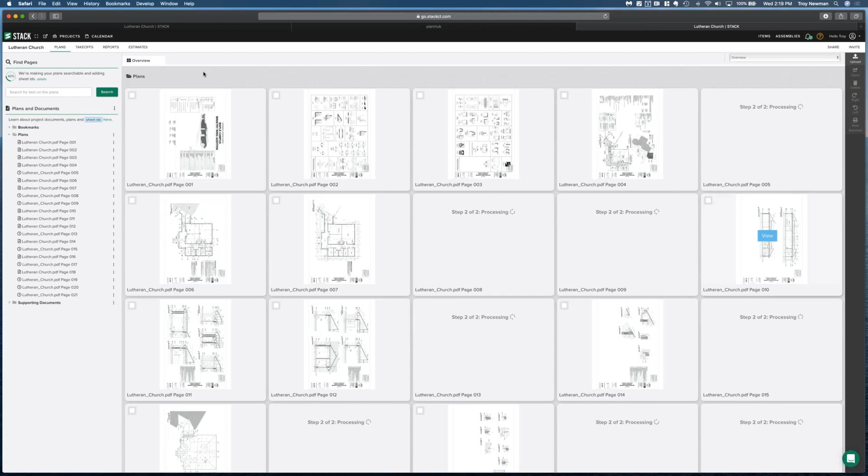Once they upload, they'll start to process through, and we're doing a number of things at this stage. We're taking that individual PDF and splitting it out. Let me hop into one that's already processed through. We're going to split that out into individual thumbnail images. We're also OCRing all those plans to make them content searchable, and we are also adding automatic hyperlinks so that you can zoom in and find the details.

As a best practice, if you're dealing with a large project, we don't have any limits. So whether your project is 20 pages, 200 pages, or 2,000 pages, finding the plans you want to measure is really key. We give you some solutions to help with that.

So I mentioned everything is OCR, so we can do a search for that. And we also do visuals, so we give you the thumbnails so you can quickly see, well, this looks like a site plan. We have some elevations here, some architecturals here, and a roof plan down here.

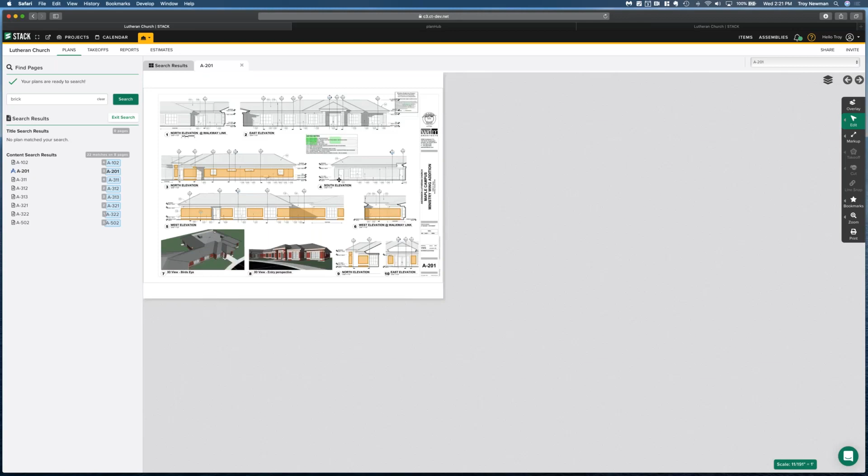So we do that as a way for you to find more quickly what you're looking for, but you can also content search. Say that I was looking for anything that had the word brick on it. It was very fast. We found 22 matches on 8 different pages. To see one of those, I'm just going to click on it, and it's going to open that page up. At this point, I'm just going to hold down with my mouse and use my scroll wheel to zoom in, and we can see that it has identified the word brick on those pages.

What's also really nice is it filters your overview. So whereas we had many plans here before, it is only going to show me the 8 plans here that have to do with the brick. So if that's all I'm interested in measuring, I can stay and just work from this view. If you want to see everything back again, we can just exit search and back we go.

Also, by default, everything is going to upload into the plans folder. It's a best practice to be organized, and it's very, very easy to create new folders within Stack. There are some general plans down at the bottom, so you can create a folder and then basically just drag and drop those plans into the folder structure. Very, very easy to set up folders and organize your project.

All right, so we've done text search. Let's talk about hyperlinking. If I click into sheet A101, I can zoom in here and see that we have hyperlinked this detail. What this is saying, as you're learning and trying to figure out what to measure while reviewing your project, is that there's something going on in this area of the plan on page A121, section A.

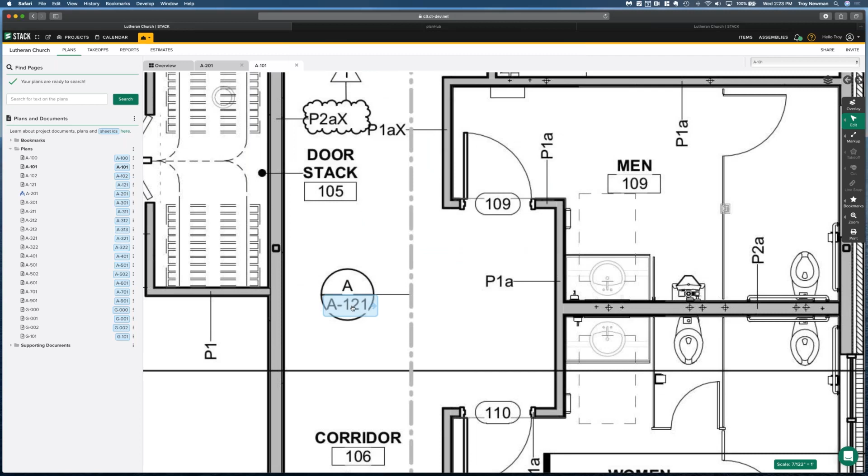What's really nice about this is once you get to your spot, we're going to remember your zoom level for this detail. So I can close this out, and if I go back, it's going to take me right where I left off. Now, if I wanted to further review this, I could open this up in its own tab above, or open this plan in another browser window. If I wanted to drag that over to a second, third, or fourth monitor, I'm just going to grab that tab and move it over just like that.

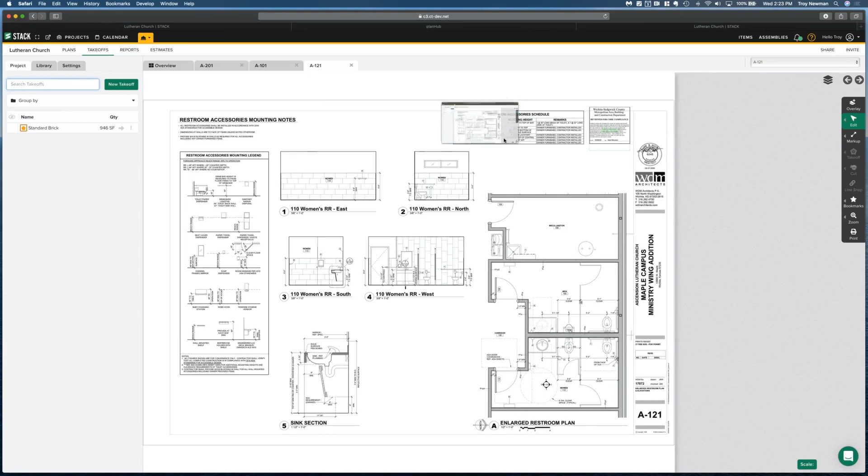So a number of ways to help you quickly identify, understand, and get to measuring on your plan.

So let's talk about measuring. Right now we've been focused on the plans tab up here in the upper left, just to orient yourself to the screen. To measure, we're just going to go one tab over to our takeoffs. You can see that I started one here just as an example - I started to measure this brick, and you can also see that the thumbnail shows the brickwork that I've measured.

So you can quickly reference just via the thumbnails, okay, I've done some measuring on this plan, and we're also going to put this little compass symbol right there, again, so you can quickly find the plans that you've measured on.

So I started with some brick here. Again, Stack works with any trade. We'll get in here and do some measuring on some walls in a minute, but it doesn't matter if you're in masonry, concrete, plumbing, electrical, or landscaping - the sky's the limit with what you can measure in Stack.

And what's really nice is the tools. I'll run through the drawing tools, but they all function the same, so you don't have to learn a new drawing technique based on the industry. All of our tools work the same. So let's hop in, like I mentioned, and measure some walls.

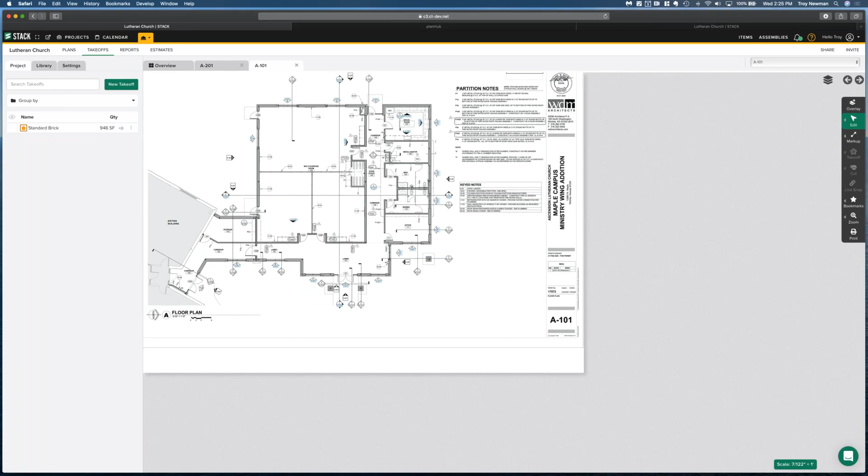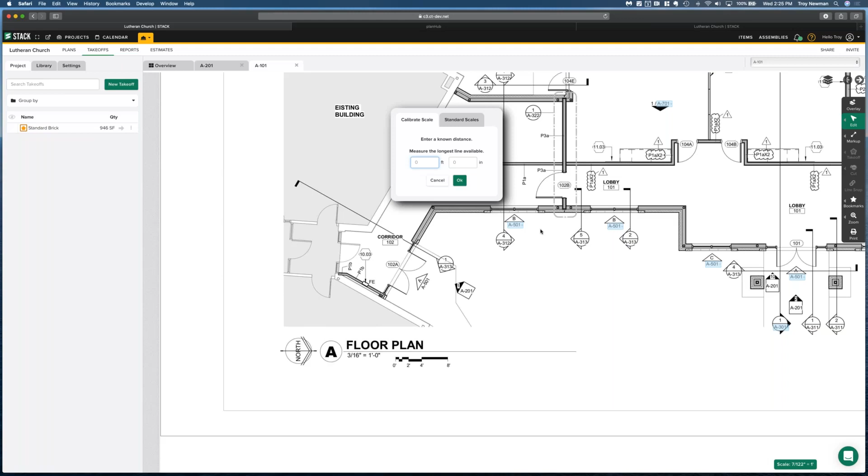Another best practice is the scale. This one, and we randomly picked this project, but it appears to have a scale issue on the other plan, so I'm suspecting it will here also. So we give you two different ways to set the scale. You can click on your little scale box and calibrate, which is really important. If there's a known dimension on the plan, you can use that to calibrate.

Or sometimes the architect was nice and gives you a nice little scale here. So I could say, you know what, there's an 8-foot known distance. I'll click OK, do one click here and one click here. Once you calibrate, you can be 100% assured that your scale is correct.

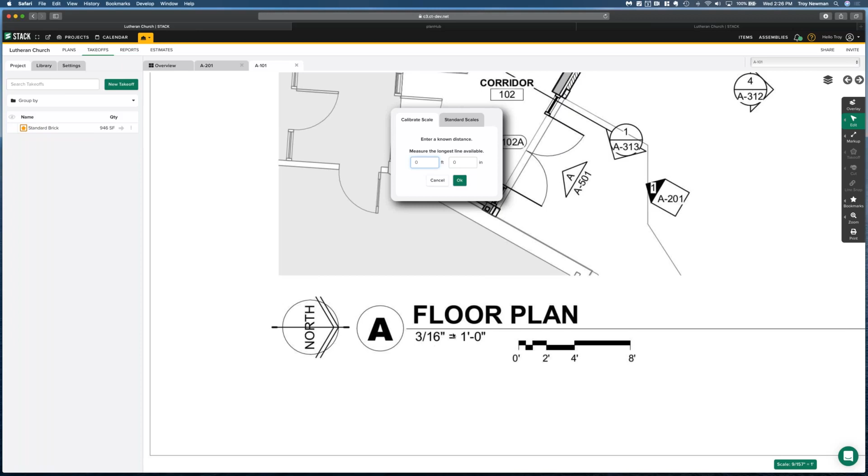Let me show you the other route here. I could go with the scale that's listed, right? So the architect lists this as 3/16. I can go to standard scales - we've got our architecturals listed above, civils down below - and I can grab that 3/16 scale. If you go this route, best practice, please verify the scale.

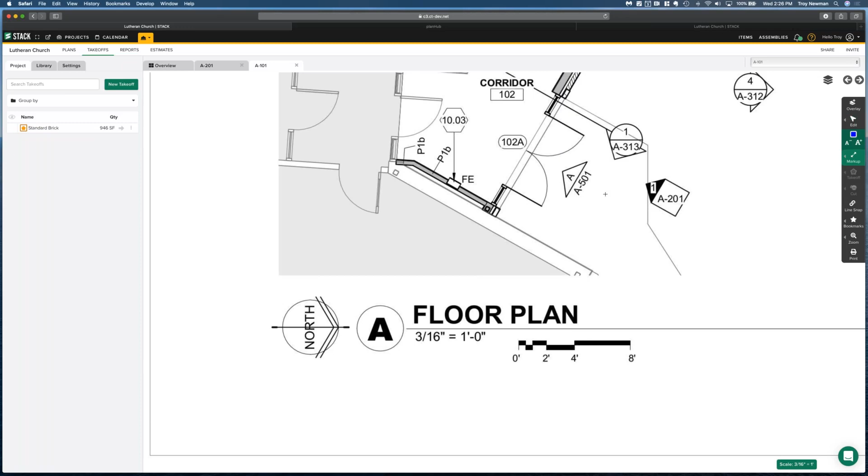So we have a number of markup tools, one of which is a dimension line that you can use to verify. You can verify here or anywhere a known distance on the plan - a standard 3-foot door should measure. We can see, okay, telling us the door width is a little over 10 inches. We can clearly see that we have a scale issue with the plan.

If we go over here, 8 feet, we can clearly see. Usually if a scale is off, it's not off by a couple inches, it's off by a significant amount. So again, highly recommend calibrating - that's just the surefire way, but if you're going to go with the standard scale, just please verify it with the dimension line.

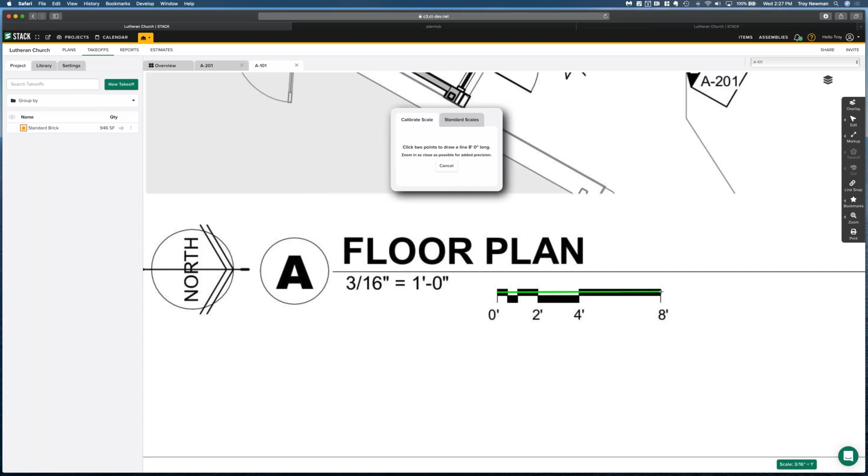It doesn't matter how much work you do on the project, if the scale is incorrect, it's not going to help you. Luckily, you can change the scale after the fact. So if I had completed all my takeoffs and noticed my square footage looks a little off, you could simply multi-select everything you've drawn and change the scale.

So best practice is use software. It makes it so much easier. A lot of people still measure on paper, which is great, it's functional, but software gives you so many advantages. Let the software do all the hard work for you.

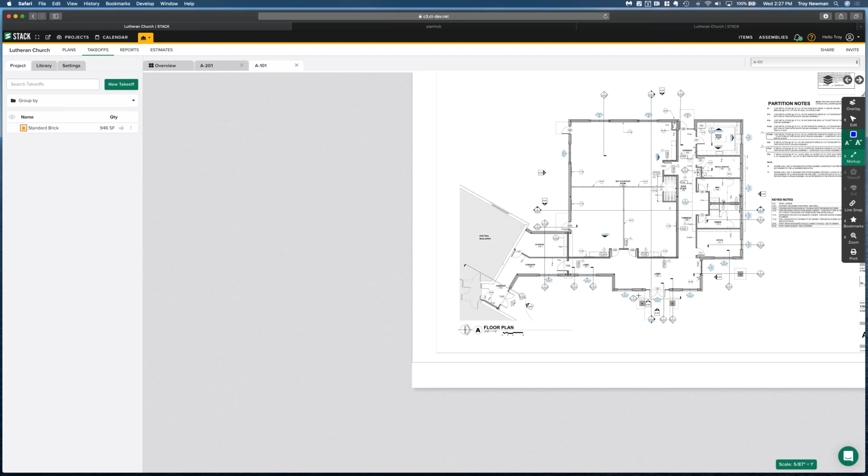All right, let's talk about measuring. With Stack, we are going to create a new takeoff for every new type of thing that we're going to measure. Okay, so hit new takeoff, and I'm going to give it a name. So say that we're going to do a painted wall.

Here in this area it's helpful to be descriptive—again, a best practice. I could do a painted wall, and down here say this is Sherwin-Williams, SKU number, boom. Things like this are only going to help you in the future. If I just put 'that was a wall' today, that would be great, but if I'm awarded the project six months down the road and come back, I'm like, oh, I wish I would have taken the extra few seconds to give me that information.

With Stack, we're going to name our takeoff and choose our corresponding measurement type. In this case, it would be a surface area measurement. But for any of these, you can click on it and we'll give you a text description right there of what that is. So if you're brand new to Stack, you'll find some guidance here on our measurement types. We're going to go with the surface area.

Basically, we're going to do a linear measurement of the wall, and then the software is going to prompt us to enter in the wall height, and then the system's going to calculate that square footage. So I'll hit start. This is where it's going to ask me for the wall height, and then off we go.

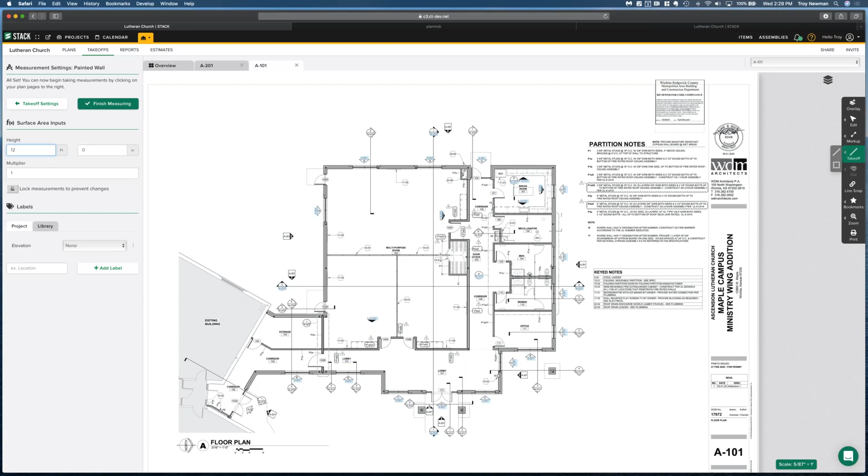So I'll run you quickly through how the software works. It is one click to start, drag my mouse, one click for every corner, and I'll just work my way around this room, clicking at every turn, and double click to finish. And that's it—it's going to very quickly give you the square footage that you measured, okay? To reactivate this measurement and keep measuring, I'm just going to click on the little green arrow and off I go.

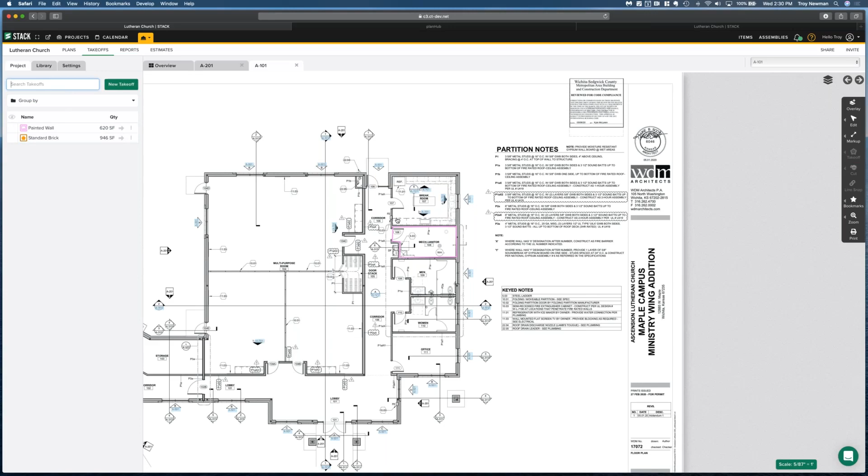So let's talk about best practices here. When you first start measuring, again, it's one click to start. You can see my line is really wavy—I'm in a free form mode. So here, if I press and release the shift key, you can see that it forces me to draw straight lines. It's going to force me to draw 180s, 45s, or 90-degree angles. It makes drawing much, much quicker and also looks more appealing. So there we go—you can see I was a little sloppy up there, much better.

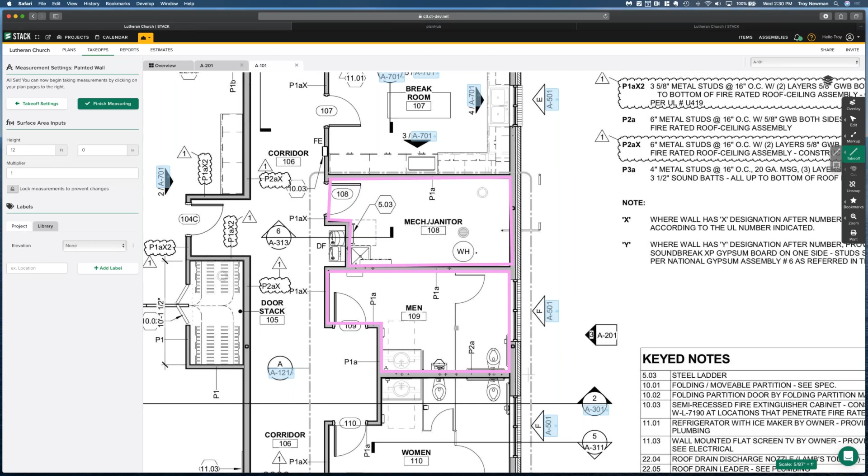To make things even quicker, if you're working with a rectangular or square type room, just move your mouse over to the right-hand panel and choose our rectangle tool. For this, I'm just simply going to do one click in this corner, drag diagonally, and double click in this corner. So it's a faster, more efficient way to do your measuring. And we can see here that it's continuing to add our square footage for our walls, which is fantastic.

Another best practice is to set these up as templates, okay? So granted, I started to do takeoff, I typed, I chose a measurement type—that's great—but to save time in the future, what you want to do is build these once, click this little ellipsis right here, and add it to your library. So what that does is create a template.

So the next time you upload a new project, your project tab will be empty because you haven't started yet. You can simply go over to your library, and this is searchable.

There's my painted wall, hit my little green arrow, and start to measure. So it's really, really that fast.

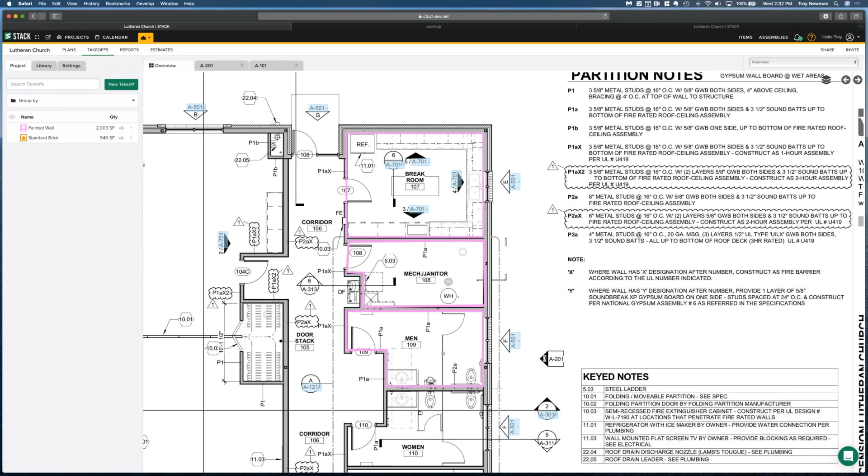What's really nice too is we've just looked at some measurements here, but if we go back to our elevations, for this I attached an assembly. Just one extra step, right below the description is a little add items and assemblies. So I added an assembly for brick, and it asked me a few questions about that brick wall, which Stack uses to calculate the materials. So you're not only going to get your measurements very quickly, but you'll get your materials just as quickly. I think you'll really enjoy it.

And as a bonus, if I were to set this up in my library as a template, it will already have that assembly attached. So start a new project, and all I'm going to do is go to my library and search for brick. There's my standard brick, looks like I have two of them. Start off and it's going to have my assembly attached. So it's a very, very fast workflow.

Something else I want to point out is, as you saw when we were measuring these walls, it gives us the walls in the totality. So I had measured, I think, 3 different rooms, and it's giving me that as 2,003 square feet in total. You can group your data any way that you see fit, okay? So you can group by building, by floor, by room, by phase, by elevation, by estimator that's doing the work. The sky's the limit on how you want to do your data.

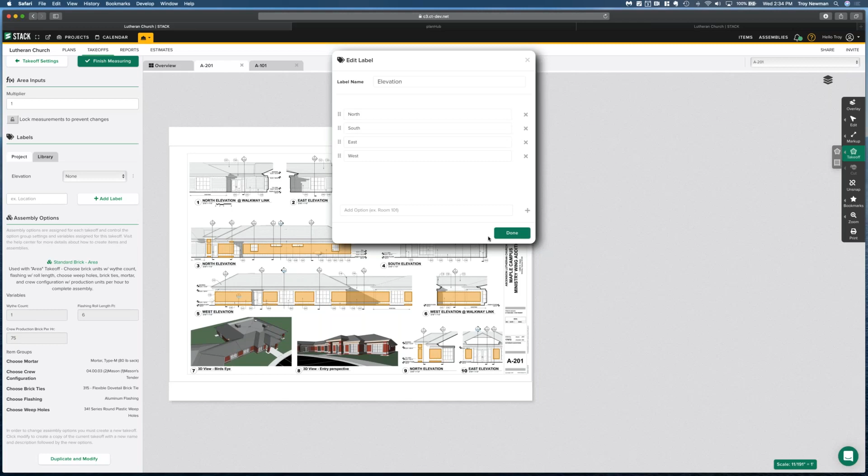For example, I can multi-select this and say this is all in the north elevation, just like that. Or I could choose the east and then start drawing up here. So you can assign before or after. Personally, I find it easier to do after the fact, but we leave that versatility up to you. Another best practice is creating these labels - not difficult to do, but...

If you have a template of it, all the better. So we have the same kind of concept here - here is my library of my different label groups that I have, and it's just one click. So if I wanted to add CSI to this project, there it is. I can make any changes here if I want to, and just bring that in. So it's really that quickly, okay?

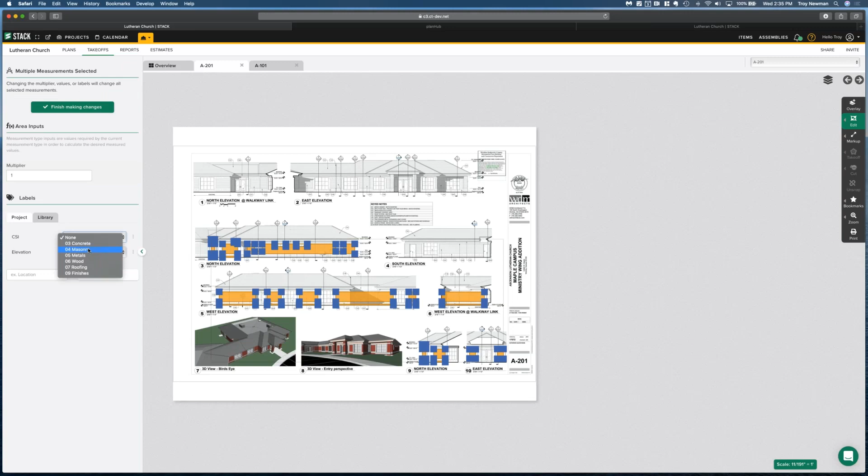Then I could do the same route, go multi-select everything on the page. The only thing I've measured so far on this is the brick, so I can assign that to my masonry. And there we go. So the power here is that you have complete control of your data, and you can view it here at the takeoff template level.

So I could say I want to group by CSI. It's going to show my masonry - my painted wall on the other pages was not assigned, and it's also not in masonry. Or I can group by my elevation - here's my east, my north, my west, what I have measured so far. We do give you one default grouping, which is plan. So we can see these are the measurements associated with 101, here are the measurements associated with 102. And you can also group your data in the report section.

Another best practice is take your time on the plan. We give you a number of different markup tools, so you'll thank your future self, say 6 months from now you're awarded, if you give yourself or a teammate some hints here. So we can go up here, we can highlight some key text here, or we could say here is an important section of the plan that you need to pay attention to.

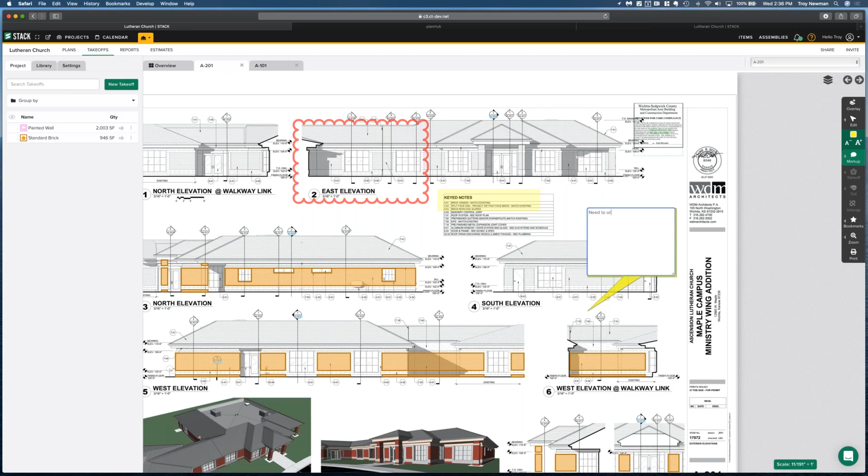Say if there's something going on here that's really important, you can leave a note for yourself or for your team. We need to order with my initials, and we're good to go there. So leave a note for yourself, leave a note for your team members.

You can control the color of these. So if Troy was using yellow highlights and Deja was using blue highlights, you can control your color scheme up here to kind of differentiate and make a little code for your different team members. So what you want to do is go through and do all your measurements.

We can look through the reports. We're going to have 3 different measurement reports up at the top, 4 different material reports here at the bottom. So quickly, here's my painted wall, here's my description, here's my standard brick.

These are the elevations that it's associated with. It's also associated with the CSI. These are going to drill down and give me a little bit more detail. I'm picking up my primary and my secondary measurement types here. Third one down is just going to show us how they roll up.

So here's all of my standard brick measurements, which roll up to total to my square footage or my linear footage. This is also a great report to find things.

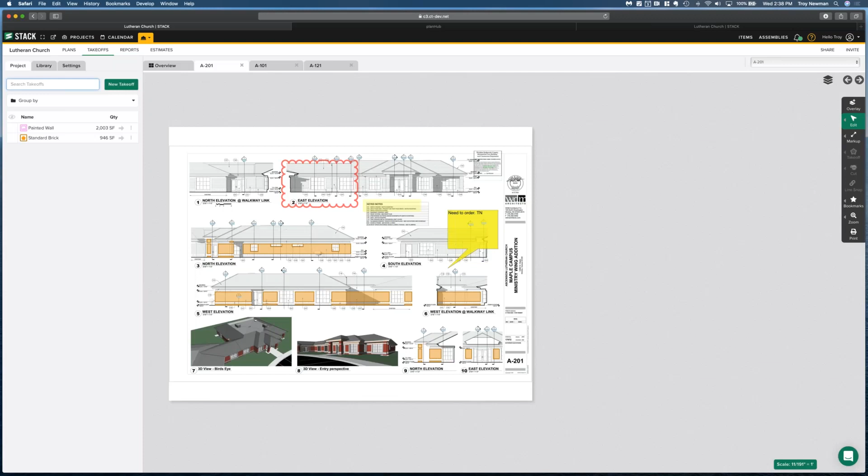So I'm like, what is that little 3.3 square foot section? I can just click on this little icon. It's going to zoom me to that page and highlight it. So I can quickly say, yep, that is correct. That should be there just like that. So it's a great way of finding things.

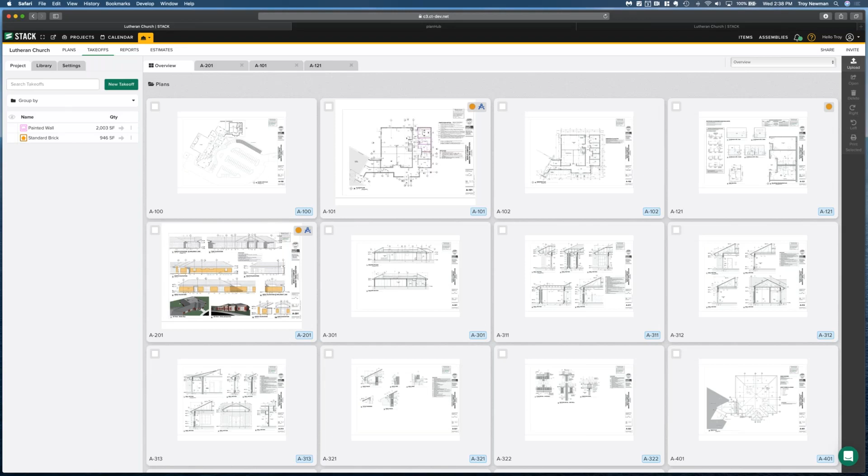So ultimately, you're going to do your measurements, save them as a template, use your label groups, save them as a template, look through your data in your reports, and then ultimately get to your estimate. So here's one that I've already started. We can see here are my materials that STACK produced based on my measurement.

These are the materials that I would need for the brick. So I didn't add an assembly to the painted wall, just for the brick, to kind of keep things simple for today. And you can go through and just row by row.

So I can add a waste factor here. I can assign a unit cost if I haven't already. So we can see I do have some pricing here that I've assigned to these items. So it brought that into the estimate. But I can simply add my pricing in here, or I can override it.

So my mortar sack, say that's increased in price, I can override that right here for project specific pricing. And then I can also add markup at the row level or at the project level. So if I wanted to add markup here, I certainly can.

I can work my way down anything that was not measured, typically like equipment. This section is very Excel-like, or you can say I needed a truck for one day and assign the cost, and you can assign a markup to that. Work your way down a little further, we're going to assign overhead, the cost of doing business.

And then here is markup at the project level. So you can enter it at the row level, at the project level, or both. So we'll give you little indicators up here. Again, this is a little project for demonstration purposes, but we're determining our project cost.